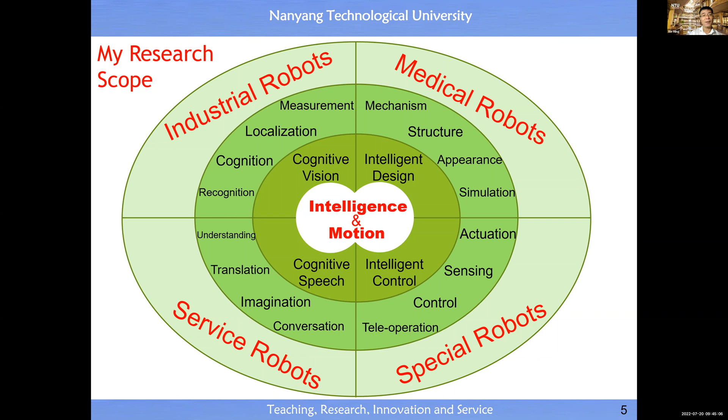So inside the inner ring, you will see the research topics for my basic research. In the middle ring, you will see the topics related to my applied research. And in the outer ring, you will see my interest in terms of product innovation. All right, so that's a short introduction about myself.

Now let's start today's talk. I will focus today's talk on three key points. First, I will try to give you a basic introduction about robotics. Then I will try to give you a very accurate introduction about manufacturing. Then I will try to convince you about the future trend in manufacturing, that is toward the achievement of robot integrated manufacturing.

So let me start with a basic introduction about robotics. Actually, if you want to have a full understanding about robotics, you need to spend at least 1 semester to study in the university.

So here I'm going to spend about 10 to 15 minutes to give you a very basic introduction about robotics. All of you know that we are the most advanced creature in the universe.

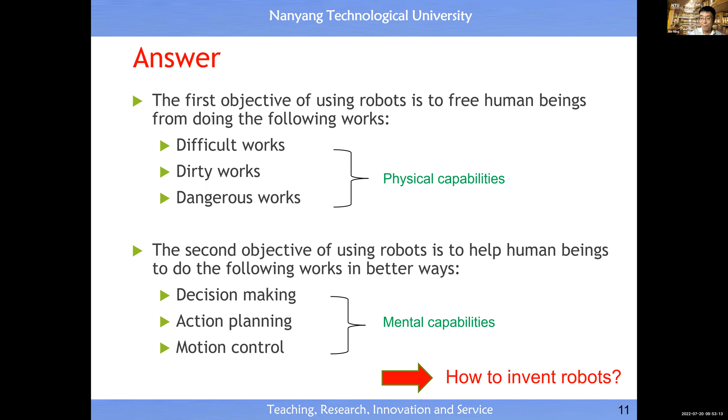Since robots will bring so many benefits to industry and society, then you may want to know how to invent the robot. So now I'm trying to give you the answer to this question by showing you the history of inventing robots in China, in Western countries, in Japan, and eventually in Singapore. It is very interesting to know that the activity of inventing robots was started in China.

If we believe that teleoperated robots are part of the robot family, then immediately you understand the first generation of teleoperated robot was invented in China under the name of puppet or shadow puppet. Here you see some examples, and the puppet was very popular around the year 600 to 1000. During that period of time, there were a lot of inventions of such teleoperated robots.

Now I'm going to play this short video for you to understand what is a teleoperated robot, in the form of a puppet.

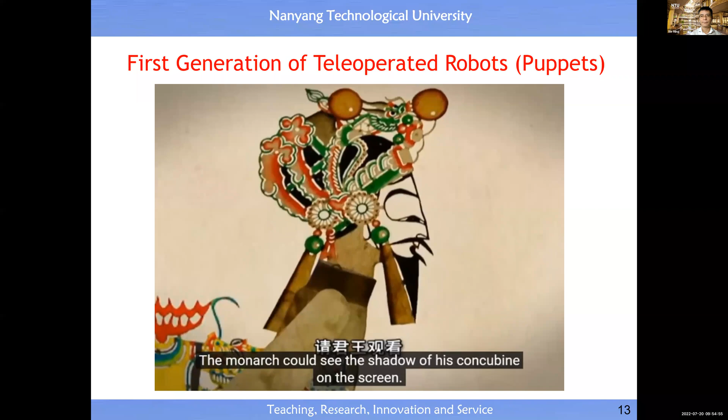A long time ago, a monarch missed his deceased concubine so much that he got sick. His ministers reproduced the image of the concubine with cloth and put it behind a screen, so the monarch could see her shadow on the screen. This was the origin of the shadow puppet, Piying.

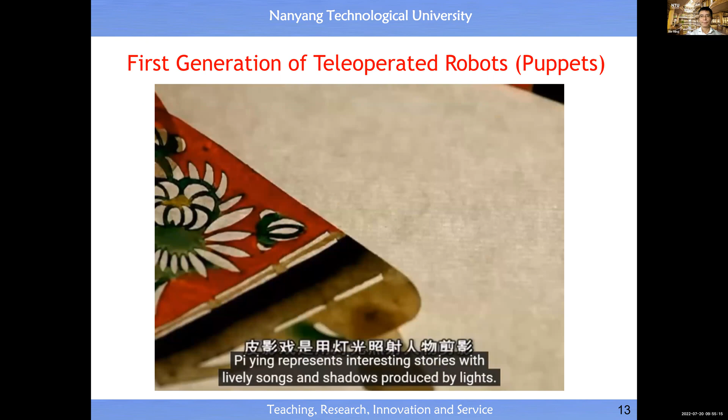Piying represents interesting stories with lively songs and shadows produced by lights. It is the earliest animated technique in the world.

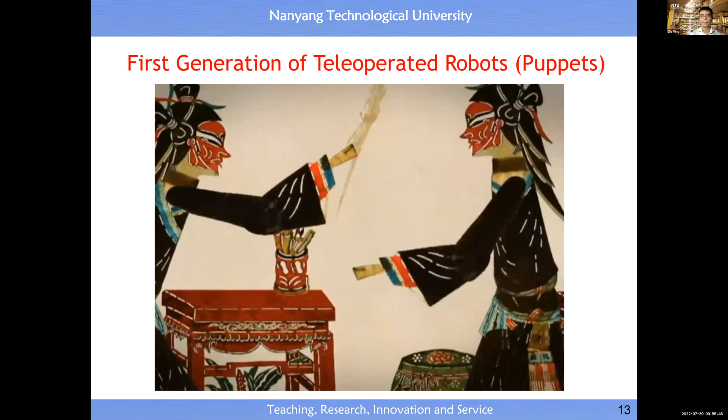The images are always made of patterned donkey leather sewn with thread. The bodily movements and facial expressions of the puppets are created by bamboo sticks.

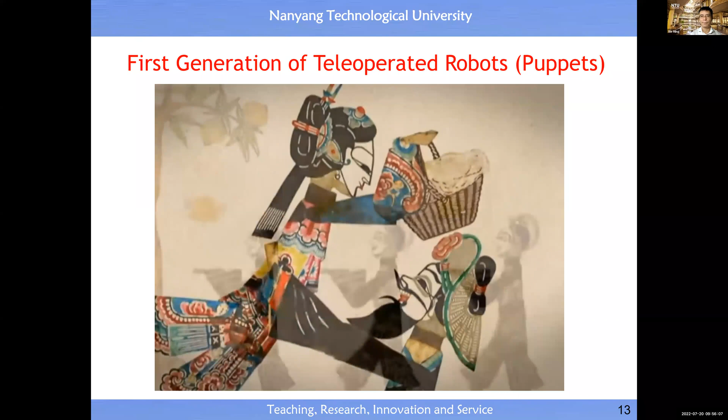Piying tells stories with traditional methods and is popular all over the world. It features not only interesting stories, but also Chinese folk art.

So you will see the invention of the first generation of a teleoperated robot was not for industry application, but for entertainment. But this video may give you some inspiration about the creation of a new job with the massive deployment of robots. For example, we can make use of today's robot to create more such entertainment products.

In this case, we need to make use of human beings to create the story, and make use of a robot to realize the story. So this gives you an indication about the job creation by today's robot.

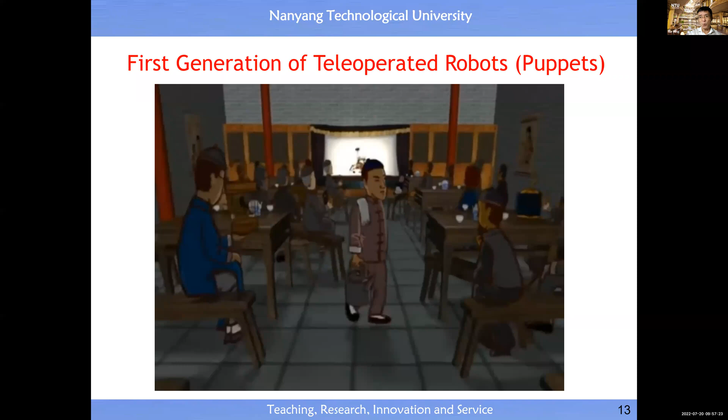If you look at today's achievement in the area of robotics, immediately you understand the major contribution comes from Western countries. For example, the terminology 'robot' was born in year 1921, and the terminology 'robotics' was born in year 1941. These two terms were born in Western countries.

In year 1942, a Russian writer formulated the three rules for the development of robots to guide R&D in robotics. Then you will see the second generation of a teleoperated robot was invented by General Electric in the USA in year 1948. And the first company in robotics was set up in the USA in year 1956.

Up to today, you will see the most advanced humanoid robot in terms of motion behavior was developed by Boston Dynamics, which is a US-based company. So immediately you understand that the major contribution in robotics comes from Western countries.

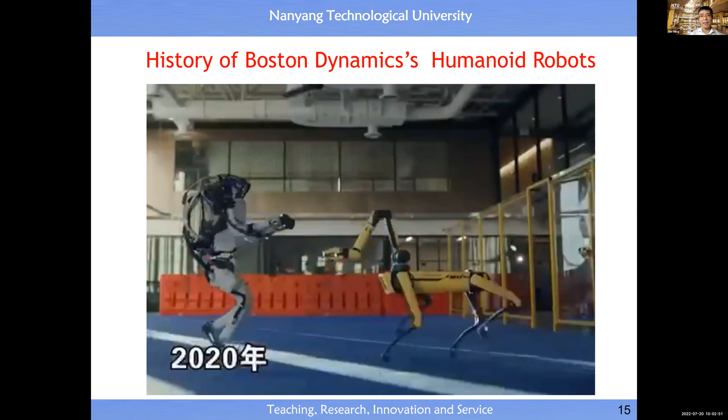So that gives you enough idea about the contribution made by a single company in USA.

Just now I already mentioned that besides the Western countries, in Asia there is a special country, which is Japan. Japan has also made a tremendous contribution toward achievement in robotics, and especially after the Second World War, the Japanese government made a tremendous contribution to support R&D in robotics.

This is why you see a lot of wonderful results or interesting results come out from companies such as Sony, Honda, Toyota, and of course among the 4 major industrial companies in the world, 2 of them come from Japan.

But it is also interesting to see that Japan has continued the tradition from China, because puppetry was invented in China and then in Japan. They continued the development of puppetry all the way to achieve today's humanoid robot.

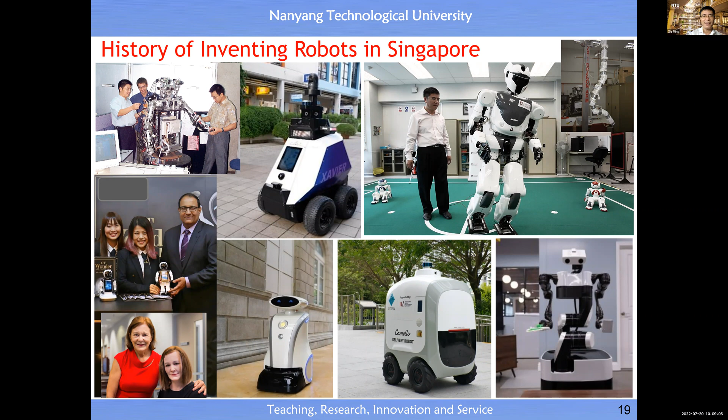So this slide basically shows you some video developed by our research team.

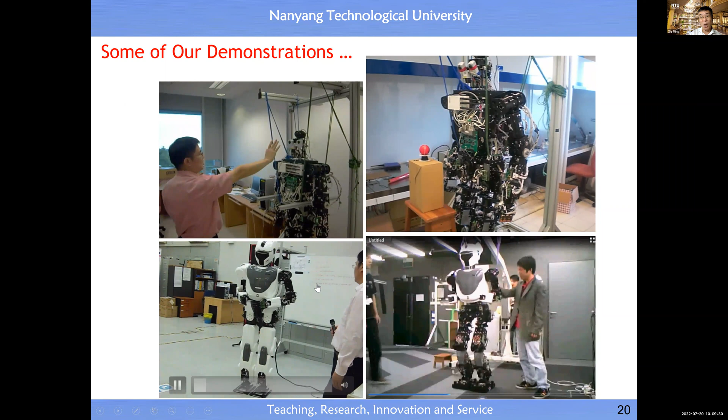Here you see human-robot interaction at the signal level or cognitive level. This is human-robot interaction at the cognitive level, where we use voice to undertake a conversational dialogue with a robot, then instruct the robot to perform a task. This video shows you the level 1 intelligence which could be reached by today's robot.

This is a typical scenario of doing hand-eye coordination. So today's robot could undertake hand-eye coordination autonomously.

This video basically shows you human-robot interaction at the signal level. The robot has a sensor to sense interaction force and interaction torque, and based on the sensory output, the robot automatically adjusts its pose, or position and orientation.

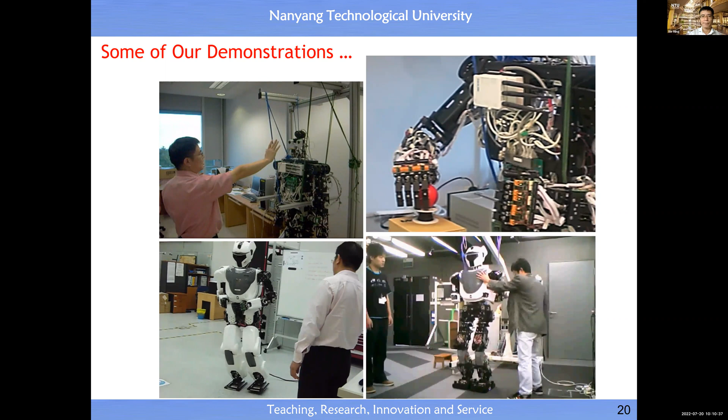Okay, so we move on. Now you may want to know what is a robot. For those of you who have attended a robotics course in the past, you know that the original definition of a robot basically refers to an industrial robot.

In the definition of an industrial robot, we focus on the key concept of a reprogrammable machine, which could carry different types of tools for the performance of different types of tasks in industry. However, in today's context, that definition is no longer valid for describing today's robot.

Here I give you today's version of the definition. We could consider that today's robot is an embodiment of a body, brain, and mind, which could undertake three types of important activity. The first activity is to perform or execute motion. The second activity is to perform a task through the execution of the motion. And the third is interaction with people.

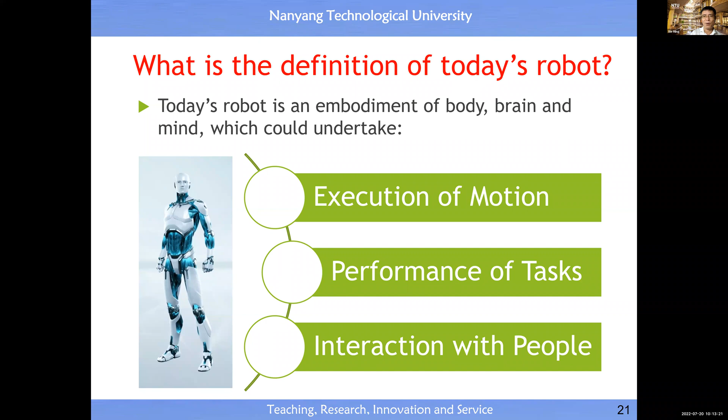In this case, it is very important for human workers to have the capability to undertake conversational dialogue with robots deployed in the production line for the purpose of undertaking the actual work. This also gives an idea about the creation of a new job. In future, we may have control rooms where humans serve as masters, just to monitor the activity of robots inside the production line. So it is very important for us to achieve human-robot interaction at the cognitive level.

For example, how to make use of human language in order to program and reprogram a robot for any specific task to be undertaken by the robot, etc. So this slide also helps you think about the creation of a new type of job with the deployment of robots in industry.

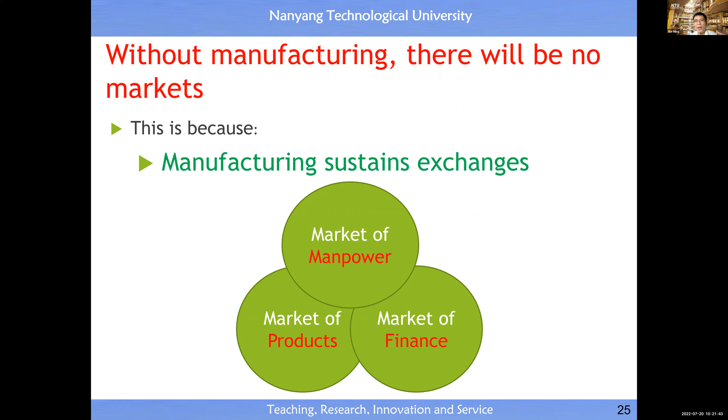Today, if you look at the market, you can identify three segments: the market of manpower, market of product, market of finance. For employees, the market of manpower is very important, because it will offer job opportunities to those who seek employment. So without manufacturing, we cannot create this market.

In terms of exchange, this is background knowledge for you to know. It is quite interesting to know that there are 4 types of exchange. We can have exchange between result and result. We can undertake exchange between result and currency—it's like you sell a product and in return receive money, or currency.

Or we can undertake exchange between currency and result—it's like you spend money to buy a product. For the 3rd type of exchange, this is dominated by the buyer. For the 2nd type of exchange, it is dominated by the seller—I produce result, I sell to the market.

But we must pay attention to the fourth type of exchange, where exchange may occur between currency and currency. Knowing this type of exchange is quite important for decision makers and policy makers in any country. We must limit this type of exchange, because the fourth type of exchange does not need to have any result.

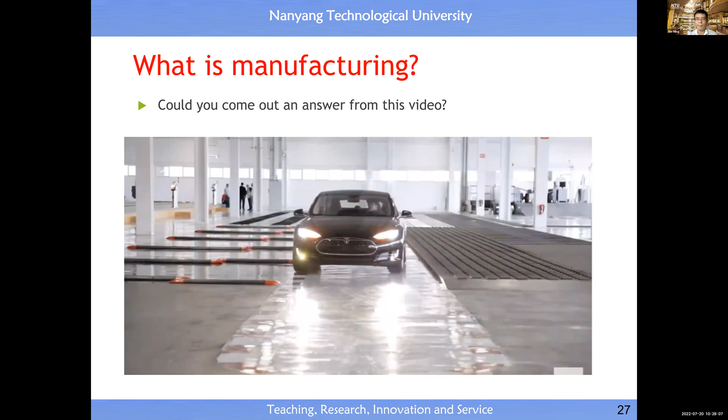Based on the observation from this video, I guess all of you may believe you know the answer to this question of what is manufacturing. So then actually it's very interesting for us to know what should be the most accurate answer to this question of what is manufacturing.

It is interesting to know that the answer came from Lao Tzu's saying. You know that Lao Tzu lived around 500 BC. For those of you who know Chinese, you understand this sentence: 一生二，二生三，三生万物. Basically it means one produces two, two produces three, three produces all. That is a layman term.

In terms of the answer to this question of what is manufacturing, then how do we understand this sentence, or this definition made by Lao Tzu, with today's terminology in science and technology?

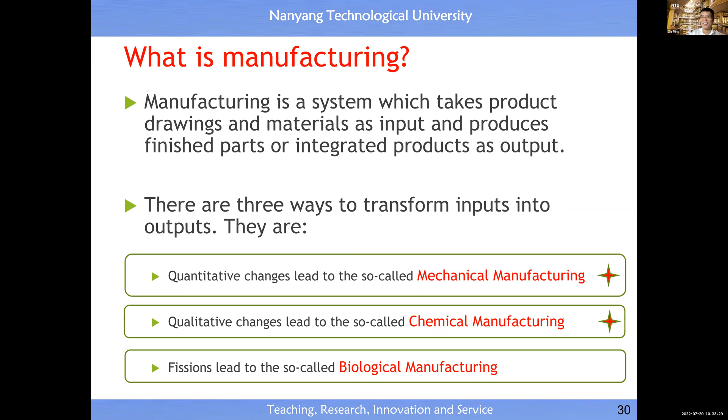This slide helps you understand the nature of manufacturing and also another important topic, which is evolution. This slide is very important. So by default, manufacturing may mean mechanical or chemical manufacturing, however the dominant conception is mechanical manufacturing.

If we translate manufacturing into Chinese, we split it into two technical terms: one is to produce, another is to create. So 制造 - these are the Chinese words - 制 means to produce, 造 means to create.

In English terms, to create basically means to design, to come up with the design. To produce means to transform input into output according to the design drawing.

It's important to understand the true nature of manufacturing, because in the mind of the general public, we always equate manufacturing to production. But manufacturing is not equal to production. Manufacturing includes production and also includes design, marketing, and sales. It's very important to know this.

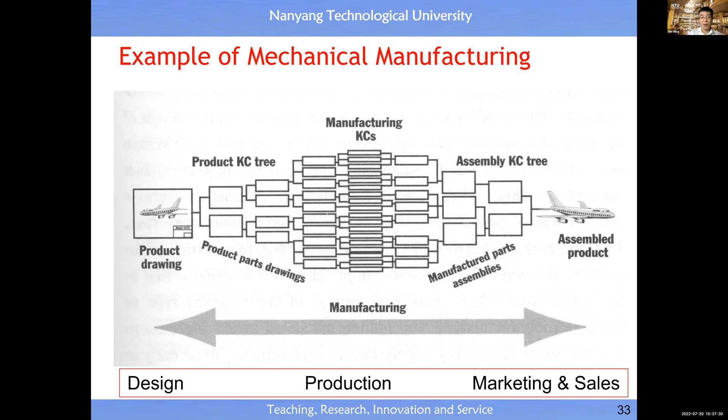Then followed by the production of this machine. After that, we must sell the result into the market. If we produce a result which could not be exchanged in the market, then we do not create any value at all. So you will see that manufacturing includes design, production, marketing, and sales.

Here is another example. If we want to produce a machine to be deployed in our home environment, to help provide basic service there, then we must first design such a machine, then produce it, and eventually sell it in the market. So again you see design, production, marketing, and sale.

These form three integrated parts inside manufacturing. This just helps you understand the difference between production and manufacturing, and this understanding will also help you understand the shift of job scope.

Inside production, some work could be tedious for human workers to perform. Therefore, we must relocate the job scope from production to design and to marketing and sale, so it could be more enjoyable for human beings to undertake design, marketing, and sale, rather than undertake dangerous, dirty, difficult jobs in production. This helps you understand why we need to deploy robots in manufacturing: the answer is to free us from doing 3D type jobs inside production.

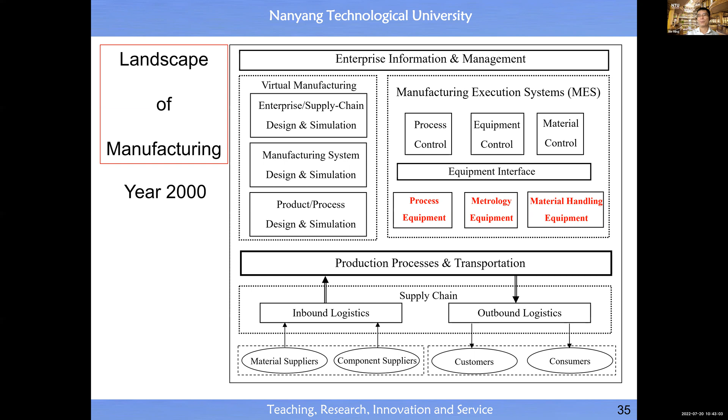So this slide gives you a full understanding of manufacturing from an academic point of view. If you understand this slide, basically you understand the entire process inside manufacturing. This slide will help you have an intuitive visualization about this generic blueprint of manufacturing, helping you interpret it more intuitively.

From here, you will see we have an inbound logistic and outbound logistic—that is the input to your manufacturing system, and the output from your manufacturing system. Then inside, you see design, production. So again, you see these three keywords: design, production, marketing, and sale. This is an intuitive way for you to see how your company could be organized.

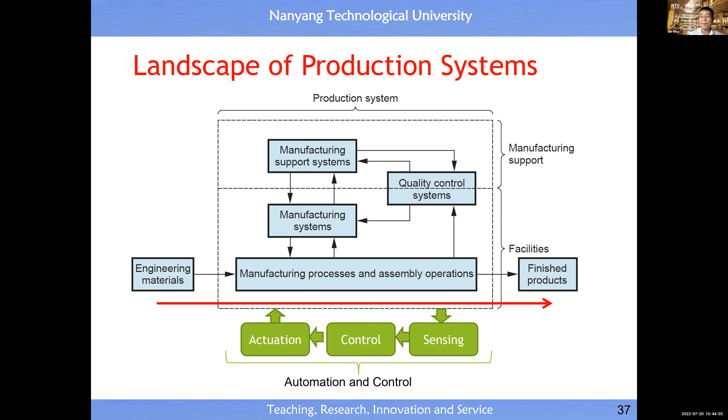So these are the generic feedback control loop, which could be present inside any process, inside any equipment, inside any operation, etc. This slide basically gives you a more detailed idea about the composition inside the production line.

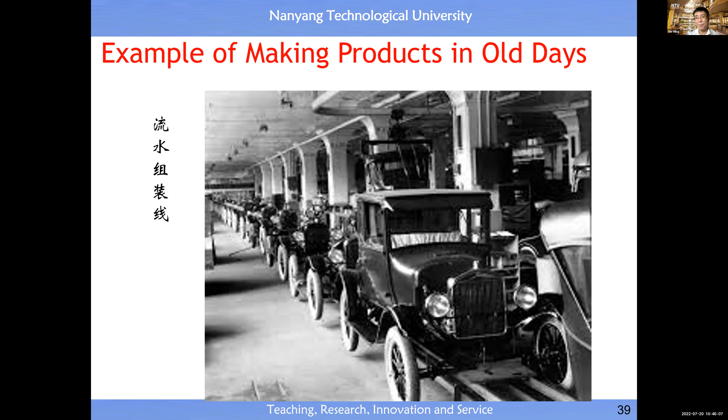Subsequently, we could make use of electric power to produce products, and also invent the concept of a production line. You will see this is a production line in which we must produce identical products—in this case, automobiles. These are identical products mass produced in the production line.

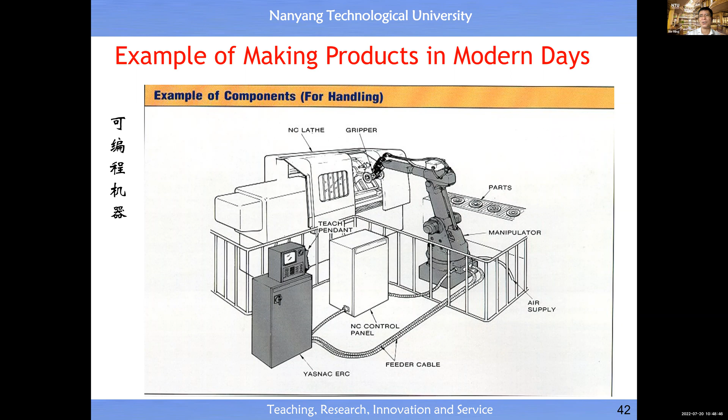Here you see a numerically controlled machine, which we call a CNC machine, and here you see a robotic arm. These are the two types of advanced machines or equipment inside a production line. By making use of these advanced machines, we could achieve mass production of identical products.

From the previous picture, you see there's an evolution from making use of human power to the use of machine power and then eventually robot power. Therefore, it is interesting for us to know the evolution of manufacturing history. You may want to know how the history of manufacturing looks like, so this video may give you some idea about the evolution of manufacturing history.

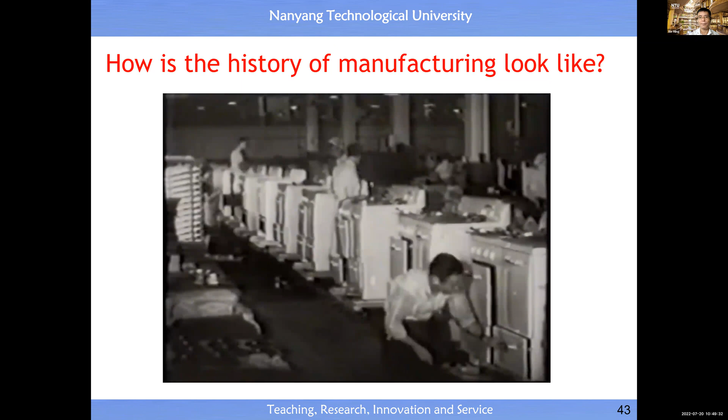When the best companies couldn't even consider robots for their production line.

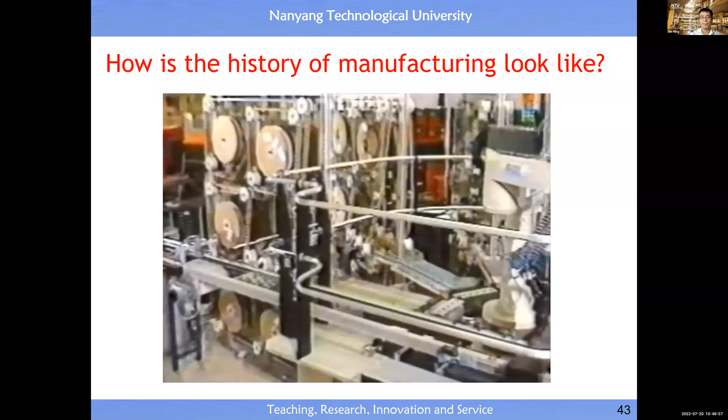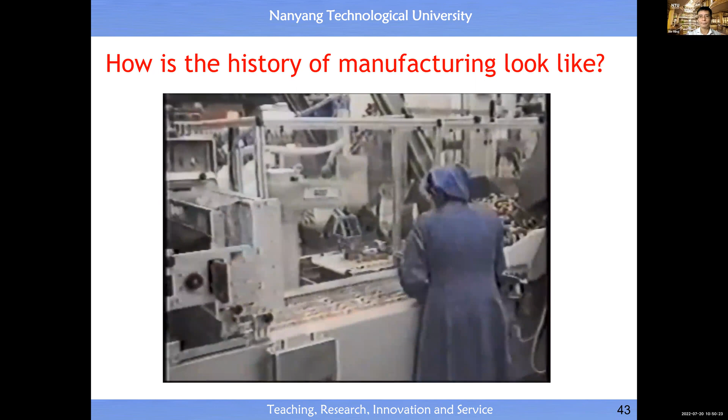Welcome to Adept Technology. I would like to introduce you to Adept Technology, into the world of robots, vision systems, and of course vision-guided robots. Adept Technology is the leader in this industry of small parts assembly and industrial robots. Nearly 50% of the 3,000 Adept robot applications use an integrated vision system to ensure quality, flexibility, and a short return on investment. I think you will be surprised to see our robots handling, assembling, and inserting parts that you come across in your daily life, like candies, sausages, CDs, and all kinds of consumer products.

So this should be good enough for you to roughly see the evolution of manufacturing from the use of labor or human power to the hybrid model, which makes use of machine power, robot power, and human power, etc. Today we are in the era of Industry 4.0. Then you may want to know what is Industry 1.0, Industry 2.0, Industry 3.0, and what should be the better way for you to understand such evolution.

So for Industry 1.0, we start to make use of mechanic power, steam power, or steam engine, which produces mechanic power. Because when there is a movement, movement plus force and torque, force and torque times velocity equals mechanic power. In layman's terms, it's quite easy to understand. Before Industry 1.0, we only made use of manpower or human power. Then with the introduction of mechanic power, we achieved Industry Revolution 1.0.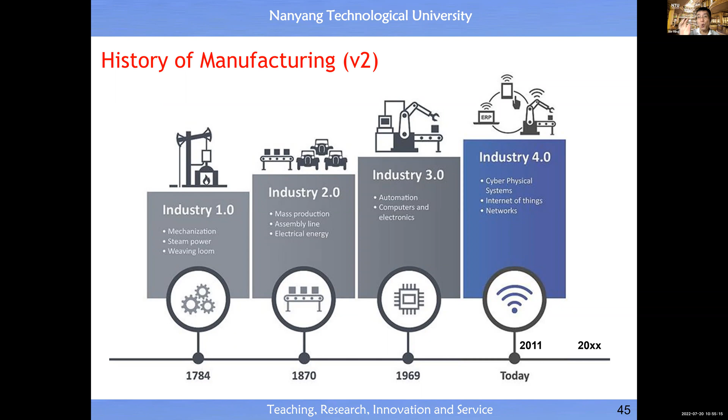So this slide helps you understand the modern history of manufacturing from the viewpoint of energy. Just now I already mentioned it: the use of mechanical power triggered the first revolution in industry, the use of electric power triggered the second revolution, the use of computing power triggered the third revolution, and the use of networking power triggered the fourth revolution. By following this thinking, obviously you could make a prediction: the use of robot power will trigger the fifth revolution in industry.

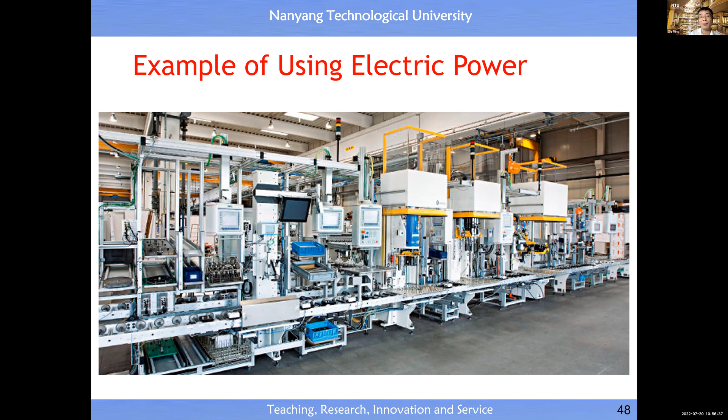And this slide shows you the scenario of making use of manpower or human power. In this production line, a lot of workers work together. Subsequently, we introduce additional electric power, and in this way we can automate certain types of things. Then we introduce additional computing power, and we have smart machines, etc. And now today we introduce networking power, to link all the equipment together and synchronize operation among the different stations. In this way, we can minimize wastage and maximize output.

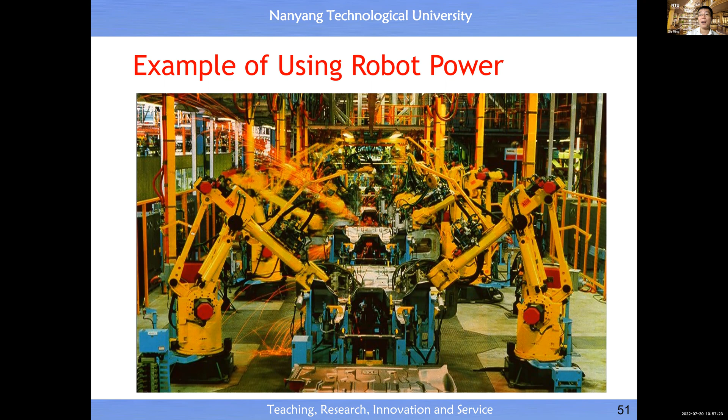Then what should be the future? The future is actually coming in, it's very, very near to us already. So this is a scenario of making use of additional robot power. And from the viewpoint of control, it is also quite easy for us to understand the evolution of manufacturing history.

So for Industry 1.0, we just made use of mechanical power, and this machine could not really be called a machine. It's a kind of mechanized tool which makes use of mechanical power, because the mechanized tool did not have a computer, did not have a brain, all right?

Then for the second generation, we introduce a controller or feedback control loop, okay? So that triggered the second revolution in industry. At that time, the controller could be an analog controller. There's no computer inside, but it's a simplified version of a brain, an analog brain, all right?

Then with the invention of the computer, we enter the third era of manufacturing, digital control or computer integrated manufacturing. So for computer integrated manufacturing, we make use of a digital computer to serve as a digital controller, so we could digitally control the machine.

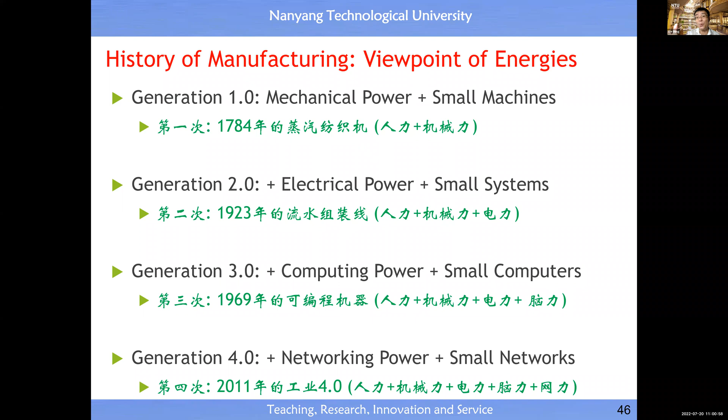Then how about the viewpoint from a businessman, from people working in industry? Are they convinced by this trend of evolving today's industry from version 4.0 to version 5.0, and believe that version 5.0 will be robot integrated manufacturing? So first, let's look at the scenario of robot integrated manufacturing, or let's understand how robot integrated manufacturing will look.

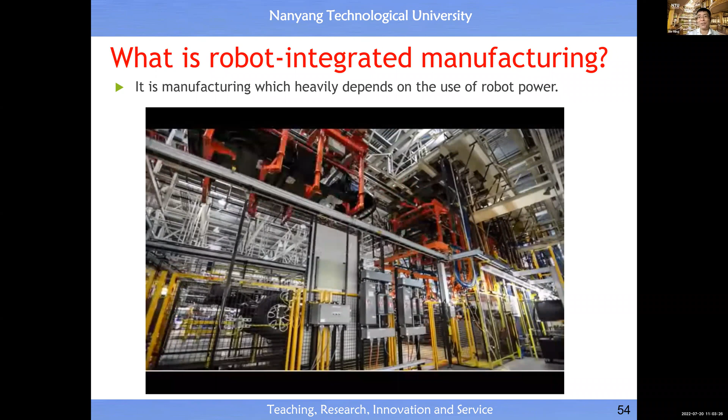Okay, so this short video may give you a rough idea about the future scenario of robot integrated manufacturing. And you'll believe that in such an environment it will be more enjoyable for human workers to work inside, because we delegate the 3D type of job to robots to perform. Then human labor may enjoy their activity inside such a production line.

So now you may want to know, why robot integrated manufacturing? We want to know the motivation in the business world, or motivation from entrepreneurs or from the market, etc. So motivation number one in the business world or in the market should be the driving force for us to look for better products, right?

And in future, we always want to achieve products which must be smart, which must be network-centric, which must be energy efficient, which must be small or compact, which must be environment friendly. These are the five driving forces for us to look for better products. So because we look for the emergence of better products, we must automatically evolve the way we produce smart, network-centric, energy-efficient, compact, and environment-friendly products.

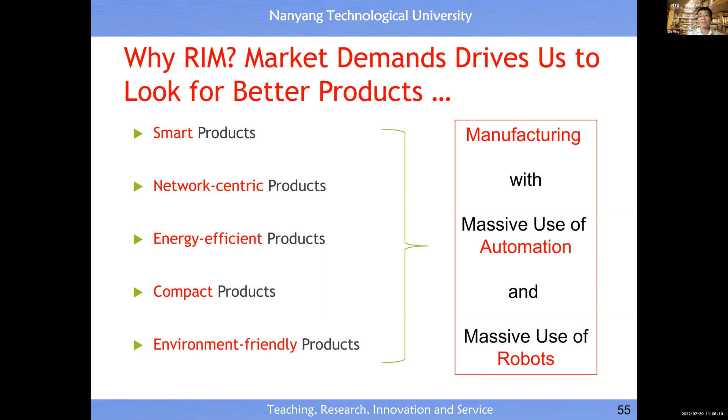So these are the demands from the business world, from the economic sector, or from society, from the consumer. These are not the demands from professors, researchers, or scientists in the academic world. From the academic world, we know the evolution of the use of energy, the evolution of the type of control—that is professors, scientists, and researchers thinking. Now you see there's also a driving force in the market, from the consumer. So this is the first motivation for us to move into the era of achieving robot integrated manufacturing.

The second driving force also comes from the business world. For the company owner, or eventually for the shareholder, investor, etc., they always want to maximize the profit and minimize the expenses. Therefore, they always try to look for better technology which will help the business owner achieve or maximize efficiency of the company, production line, etc. They always want to deploy advanced technology which will help them reduce the cost, and in this way maximize the benefit or profit. This is the second reason.

The third driving force or motivation must come from the consumer, because today when we mass produce identical products, everyone buys similar things. Actually, from the consumer's point of view, we always like to have a personalized or customized product. So how do we balance the need to mass produce identical products and also offer certain flexibility to meet the demand for personalized or customized features? Because there's a demand from the consumer...

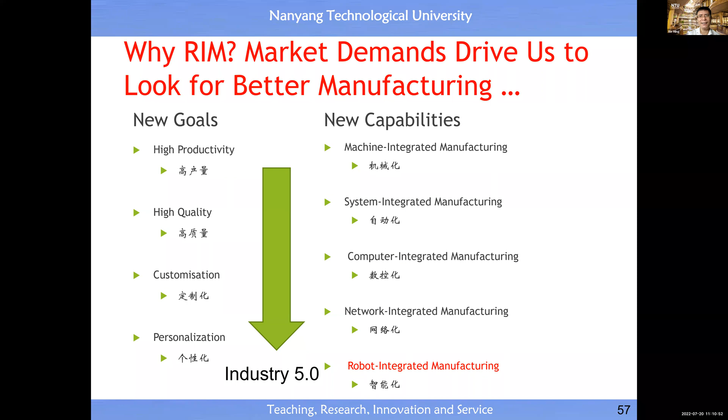So now you may want to know, is it achievable for us to offer robot integrated manufacturing? We know from an academic point of view there is such evolution, and from the business world, from the market of the consumer, there is also such a driving force for us to move in that direction. Then you may want to know, is it achievable to satisfy such a demand? The answer is yes.

So I'll just quickly fly through some key technology which will enable us to achieve robot integrated manufacturing. The first one is the automatic feedback control system. With the discovery and development of control theory, today we can design all kinds of feedback control loops. With the use of a feedback control loop we can achieve many automated systems and automated machines. Also, with the invention of advanced sensors, we can let machines achieve a high level of perception capability, and let the robot plan low-level activity. In this case, we could achieve an intelligent automation system. Today we have such technology, so it's not an issue.

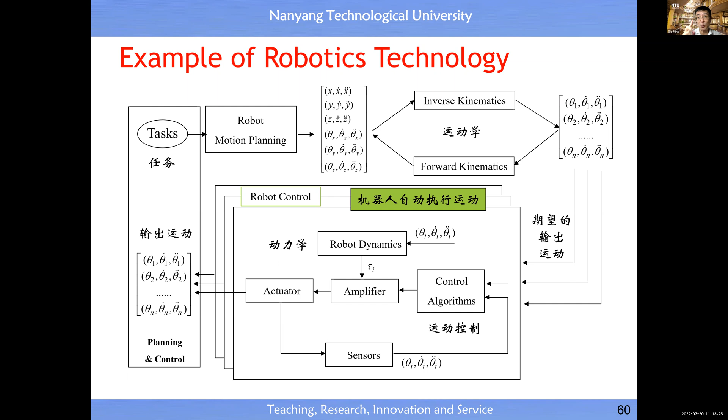If the performed motion meets the requirement of the intended task, then the robot will be able to perform any intended task. So that is the working principle, right? Today, we have all the technology and theory to implement this blueprint of today's robot, with control technology, control theory, sensor technology, perception theory, robot technology and robotics theory.

In this way, we could accommodate the conflicting demands of quantity, quality, and customization. With robot integrated manufacturing, eventually we could mass produce products with high quality and a high level of diversity in terms of product features - big quantity, high quality, and diversity in customized features.

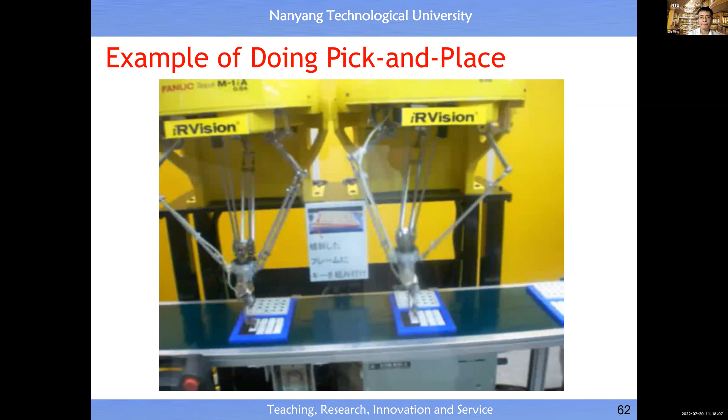Now I'm going to show you some typical activities which could be undertaken by robots autonomously. This is pick and place. And this is another scenario of sorting - one robot picks up the white color part, another robot picks up the yellow color part. For this type of operation, you see a machine needs to have a certain level of intelligence.

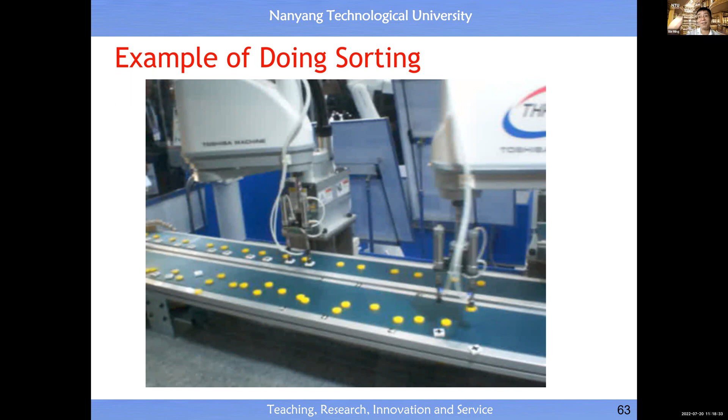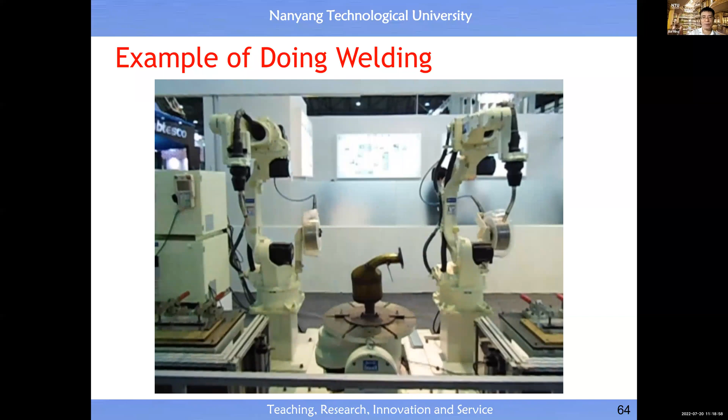This is cooperation in doing welding - two robots work together to weld a common work piece. You see the flexibility performed by today's robot. And this is a dirty job - we can let the robot do the painting, because painting is dirty and also dangerous, since the smell and vapor are harmful to human health.

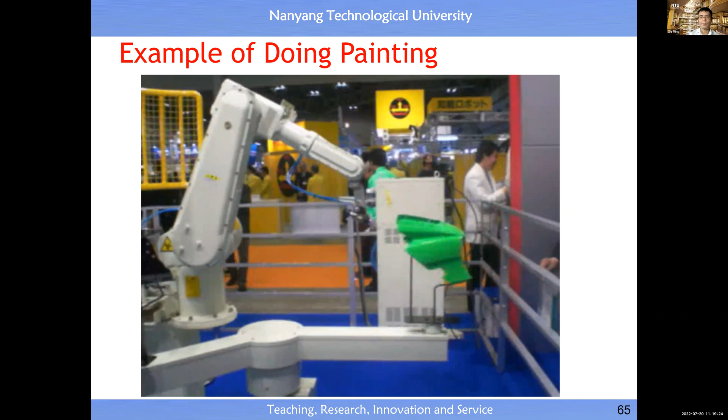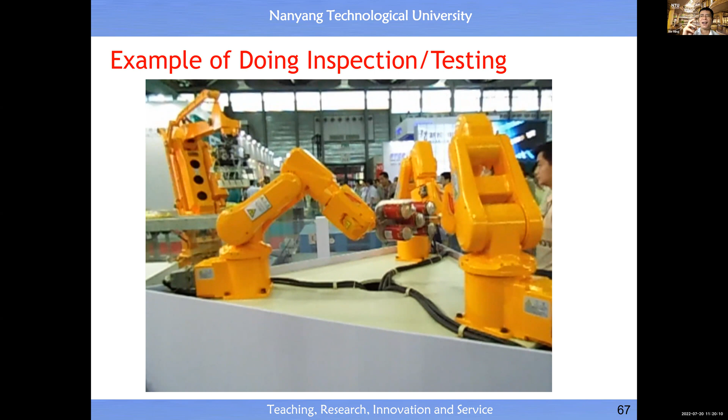And this also is a difficult job - if we do some collaboration or very complex tasks, 3 robotic arms work together, and we can achieve high precision and high accuracy in terms of motion control. This also is a very difficult task - the object is very heavy, not possible for a human being to carry such a heavy payload and still perform a very smooth motion.

Now I'm going to show you a short video about the industrial project that we have done in China.

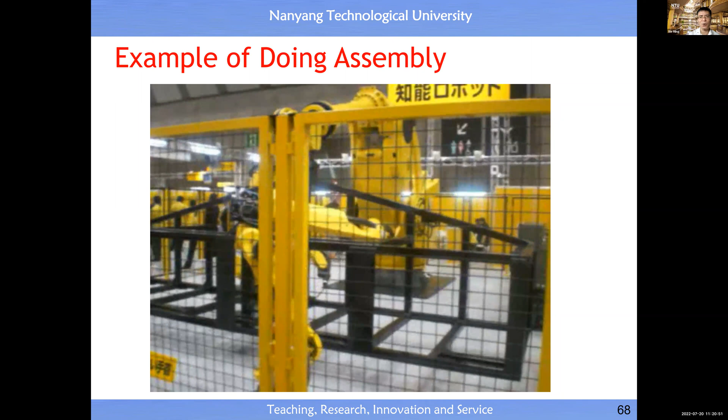These kinds of industries have a lot of trouble hiring human workers. Even if you increase the salary, after 6 months all the human workers will quit such a job because it is quite harmful to their health.

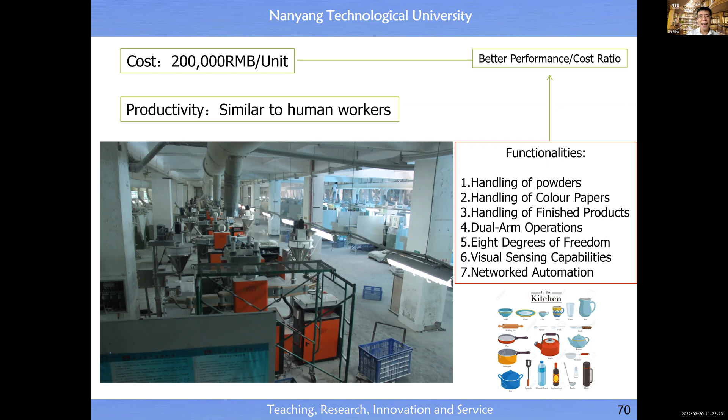So we managed to help them develop a robot to free human beings from working in such an environment. In the production line, we can deploy a robot to free human beings. How does each robot work? This video basically shows you the automated process using the robot designed by us.

The input is material in powder form. In such an environment, you will see a lot of particles of this powder in the air, and these particles are harmful to the lungs of human workers.

We try to transform the material from a powder state into a liquid state, and from liquid state back to solid state, by controlling the temperature, which can reach 200 to 300 degrees. So this is a very, very hot environment.

Inside, the material will be transformed from powder into liquid, and liquid back into solid.

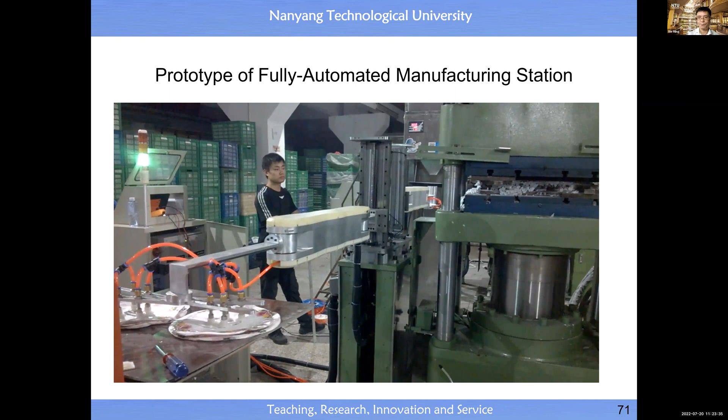For the output of a utensil, because the utensil has a surface with colorful painting, we print the painting on special paper. This paper can be incorporated inside the solid.

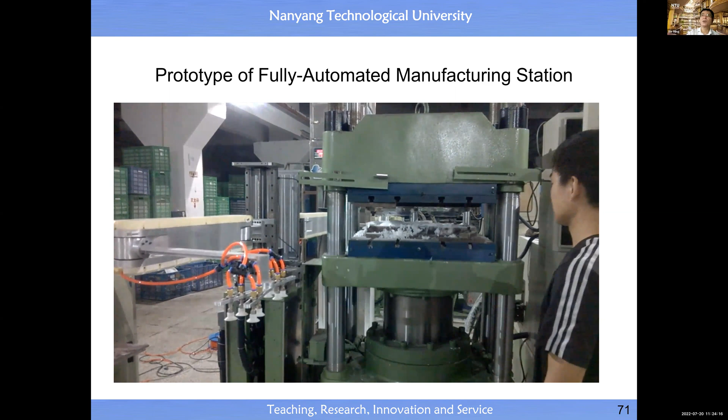Then the last process is to apply a special powder. Once this powder becomes liquid and then solid again, it produces a shiny surface on top of the utensil.

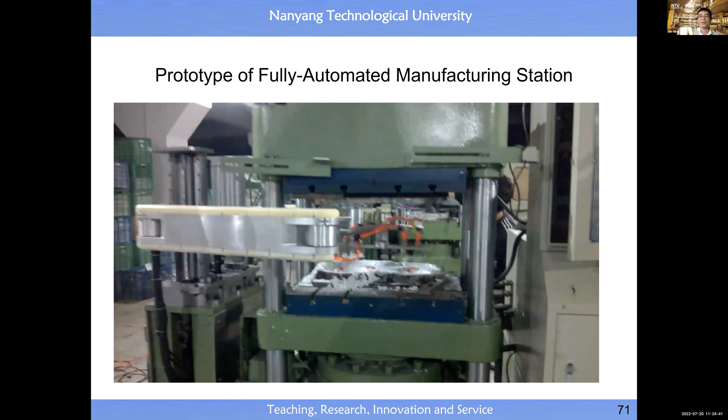Then you see the output from this process. After that, we just polish the edge of the utensil. This is the station which produces two dishes at each time, and then we just repeat.

So you see, for today's existing manufacturing process or production station, we can slowly free human beings from doing this type of 3D job.

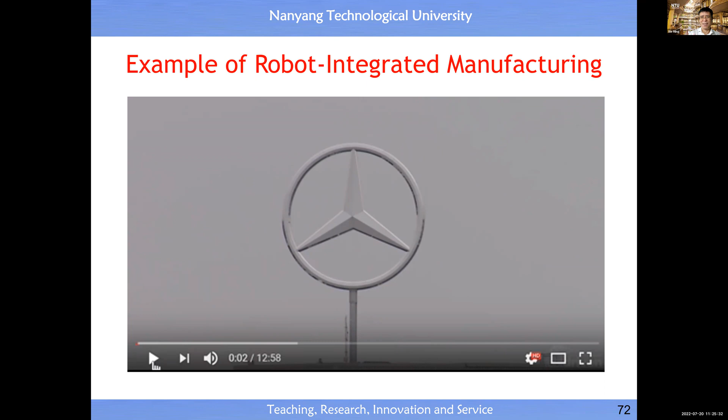Now I'm going to show you the evolution of a production line in the automobile industry. This video will show you the massive deployment of robots in the production line of the Mercedes-Benz company.

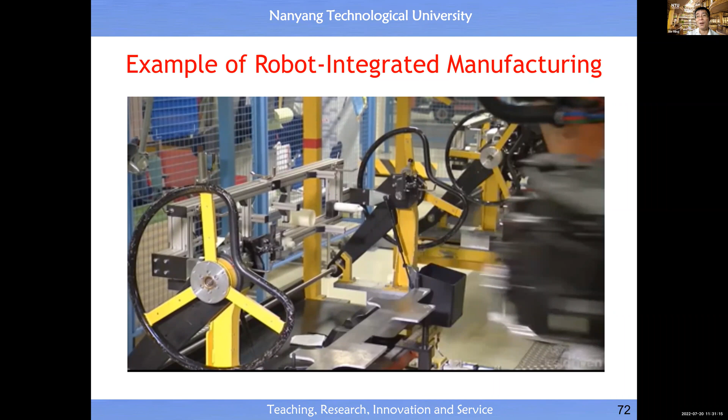So from this video, you will see that robot-integrated manufacturing is near us already, it's coming soon. Some leading companies have already adopted this evolution, and there you see the massive deployment of robots in the production line of some leading companies. So this is not very far away from us, it's coming soon.

Okay, so that's all for my talk today. I hope that by listening to my talk, you will believe that Industry 5.0 is near us, and Industry 5.0 should be robot-integrated manufacturing. Hopefully from listening to my talk, you roughly understand the nature of robots and the nature of robotics, and in particular I hope you have a better understanding of the nature of manufacturing.

In particular, you understand that there are three types of manufacturing: mechanical manufacturing, chemical manufacturing, and biological manufacturing. Interestingly, the understanding of biological manufacturing will help you understand the true nature of evolution. Lastly, I hope you will be convinced by the future trend in manufacturing, which is to transition from Industry 4.0 to Industry 5.0, and Industry 5.0 should be robot-integrated manufacturing.